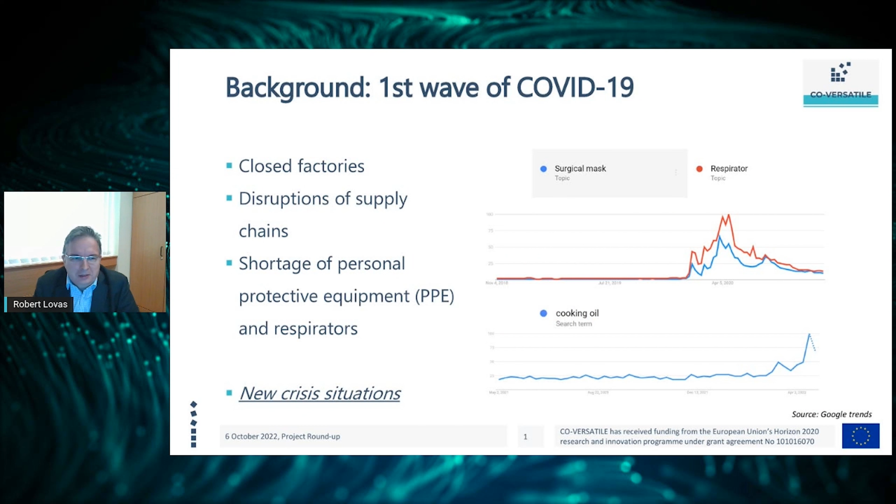On the next slide you can see the background of our activities. COVID-19, as a global health crisis, caused very serious disruptions in supply chains, as Gabor mentioned. At the same time, the unprecedented demand for personal protective equipment, as shown in the Google Trends diagram on the right-hand side, required a really rapid industrial response and production at short notice. In most European countries and globally, governments ordered people to wear face masks, which very quickly became a proven and simple way to somehow prevent virus spread and protect citizens.

So we had an extraordinary situation around the world. Everybody struggled with a shortage of masks, ventilators, disrupted supply chains, and we were witnesses of really chaotic situations. If you take a look at the diagram, we are still witnessing newer and newer crisis situations, which even caused a shortage of vegetable cooking oil recently in the UK due to the Ukrainian situation. Let me introduce some projects coping with such challenges in the next slide.

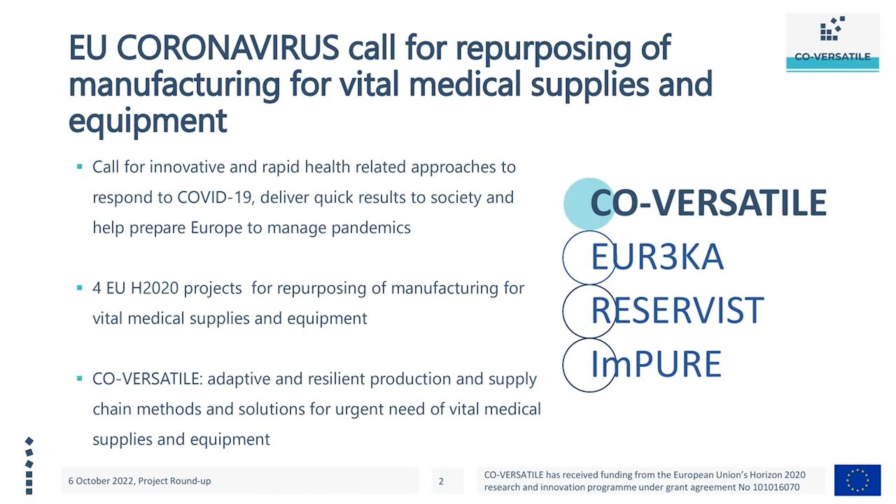On the next slide, I would like to highlight the most important achievements of our project in three distinct categories.

On the other hand, we also offer manufacturing companies a replicable method for fast repurposing of their production lines for manufacturing different personal protective equipment, such as FFP2 silicone masks, in really high volumes on short notice. We were able to increase the production capacity by 400%, exceeding the initial goal, which was only 100%.

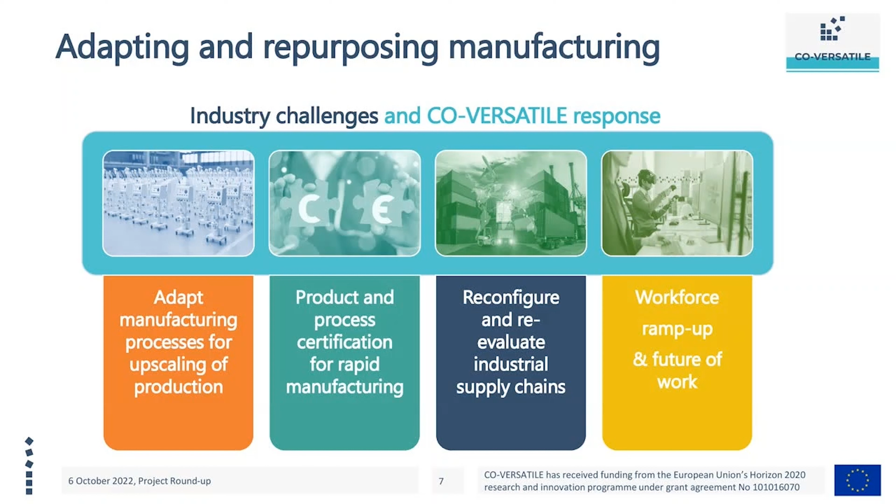You can see things like adapting manufacturing processes for upscaling of production, product and process certification for rapid manufacturing, reconfiguring and re-evaluating industrial supply chains, and also very important aspects for workforce ramp-up and the future of work. These four pillars have to be answered together, and provided together to respond to this crisis. Okay, next slide, please.

Also, as another achievement concerning the SZTAKI disinfection system, we were able to increase performance by 70%. Also, in the case of the resilient automation for manufacturing topic, we were able to double assembly capacity. And the last one I would like to mention was a very significant improvement, regarding ramp-up production of ventilators.

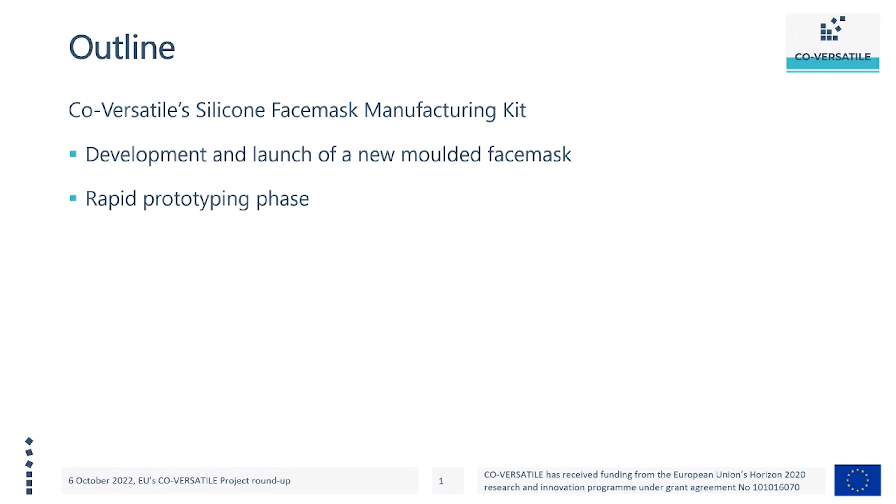Let's start with an outline. This silicone face mask manufacturing kit consists of several steps. The first is that I will go through the development and the launch of these face masks together with you. We started quite early with a rapid prototyping phase to get a better idea of the design and the touch and feel of our mask.

We transferred this prototyping result into a real product, a molded silicone rubber mask, into the mold. I will go into detail with that. And we always kept in mind an easy scale-up of the production. So depending on the demand for face masks, we think we found a nice solution to respond to changing demand.

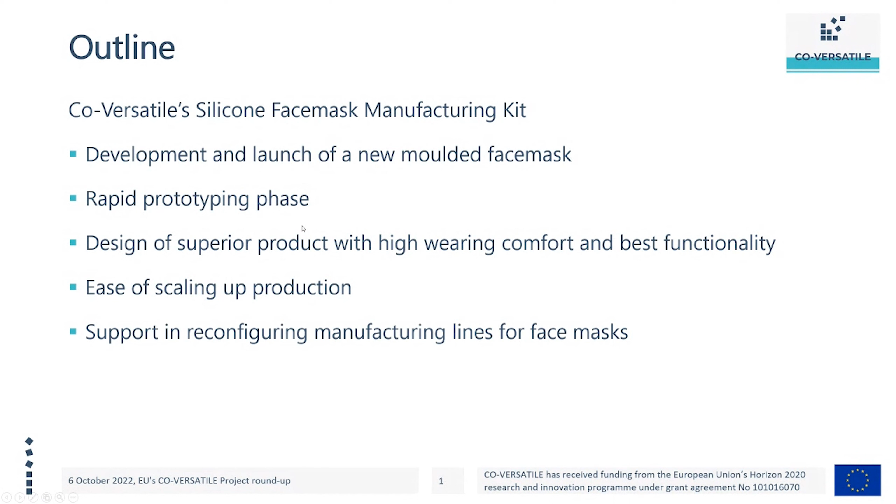We will support other manufacturing sites to reconfigure their production lines for face masks. We support them in planning their supply chain, and if needed, for the company and product certification, especially in terms of medical certification of the company.

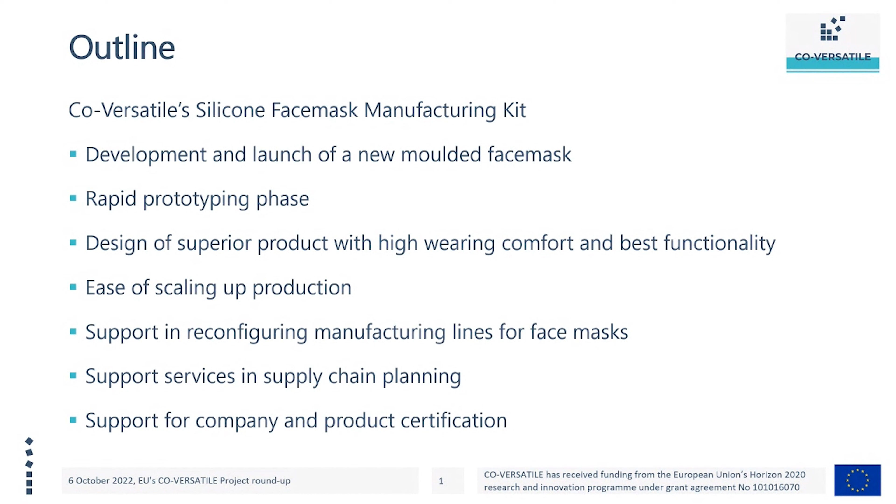First of all, we took advantage of our large intersectoral and interdisciplinary team. We were involving 3 SMEs, manufacturing SMEs: first a mold maker based in Italy, ORP Stampi, then the manufacturer of these molded parts, which uses the molds from ORP. This is SKM Aeronautics from Israel. And we had ML Engraving, an SME specialized in laser engraving of molds.

This is important if you consider wearing a rubber face mask on your face all day, then it helps if we have a nice texture.

They got support in terms of R&D for process simulation, so molding simulation tasks, by ITA Innova in Spain, and the rapid prototyping phase was done by ourselves here at the University of Hannover in Germany.

Furthermore, we got business consultancy support by a wider team - I will go into more detail later. We had help with certification issues from SUPSI in Switzerland, training documentation for enabling other manufacturing partners to build our mask by HSSMI from Great Britain. The supply chain analysis was led by Fraunhofer IML, and risk awareness and risk analysis was performed by IE Business School from Spain.

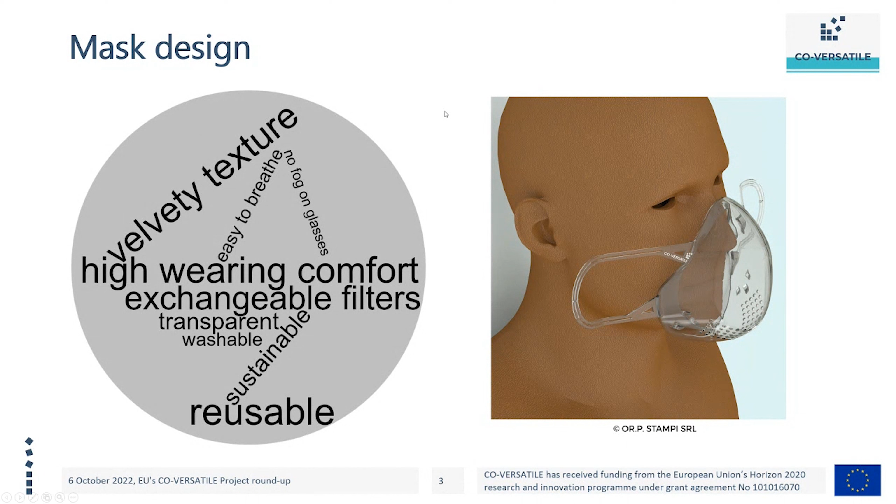So first of all, we had to choose a material, and we went for silicone elastomers, HCR grade. This is solid silicone - we would not go for liquid silicone, I will explain that later. There are medical grades available on the market by several suppliers. They are very easy to process and they are non-toxic, which is important if you look for medical certification, and also important for supply chain considerations, that these basic rubber compounds are available on the market.

Next step is the filter. The filter in our solution will be attached to the rubber mask. There we have 2 solutions available in the market: one is the cloth solution and one is non-woven filters. Both are available in grades which are relevant for us, so N95 or FFP2 respectively. Again here, we had to take supply chain into consideration.

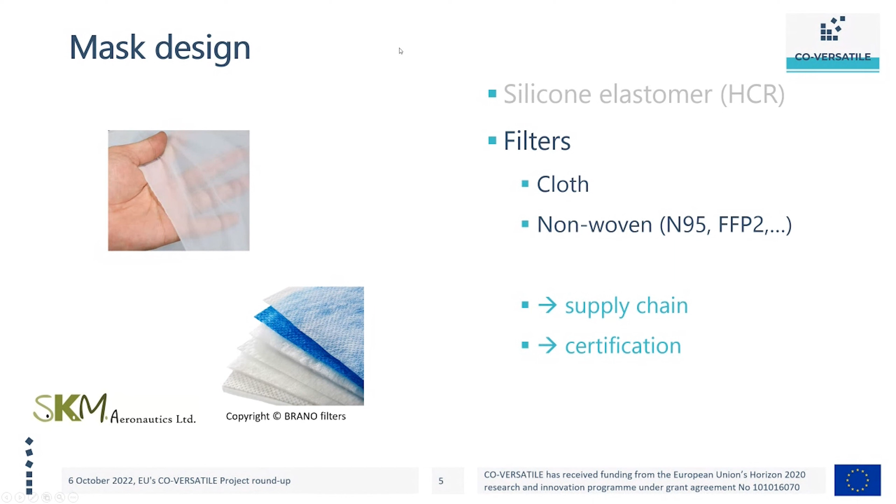Both are available very easily also from European distributors. For certification needs, both are certified and need to be certified with the mask as a whole product in a later stage, but we have to take this into consideration when choosing our filter material and also when choosing the supplier.

Transparency was one of the key ideas behind our mask production. We went for rapid prototyping based on a 3D printer with SLA, stereolithography technology, in our lab. We printed the full rubber mask in the first design to try to fit it to different faces to see how it feels - if the structure is stable when you breathe in, it should not collapse. We also printed different microtextures to see how it feels, especially on the sealing lip on your face, and also on the laces behind the ears.

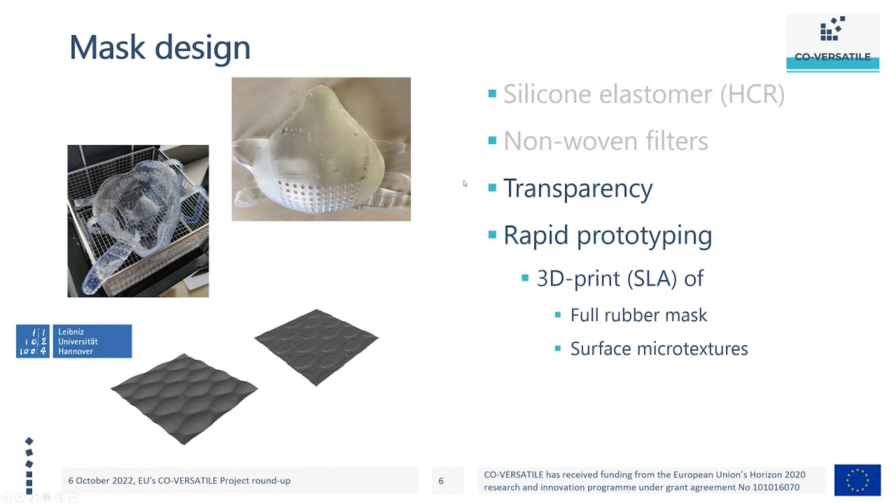At the same time, ML Engraving started to texture different flat samples at first to get a velvety texture, as velvety as possible. Later, when you see the complex geometry of the mask, you have to consider that this is a free-form surface which has to be textured from every position. They were using nanosecond or picosecond laser technology to apply this negative of the texture on the mold. We textured all the parts which are in direct contact with the skin to get as comfortable a feeling as possible when you wear the mask for a longer time.

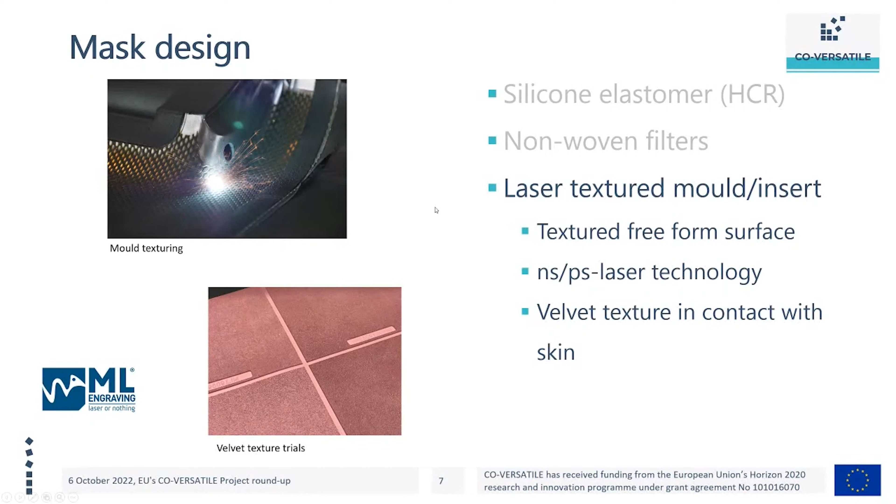For the mask design, when we summarized that, we were selecting materials. We went for the HCR silicon rubber compounds. We defined a velvet texture for wearing comfort. We went for an adjustable strap, or adjustable laces, so that it can be fit to different face sizes. We ensured a proper filtering through our cloth or non-woven filters. And at the same time, we need to seal all around the face so that the air you breathe in or breathe out goes through the filter and not past the mask somewhere else. This proper sealing also has the big advantage that your glasses do not fog.

Coming back to certification considerations, it needs to be fail-safe in use. You only get your product certified when you will wear it properly and the use is fail-safe and easy.

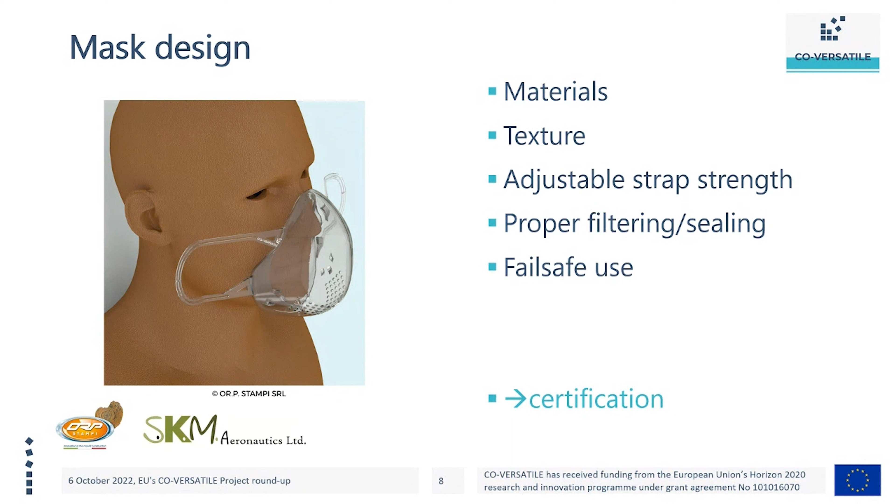Now, when we finished the mask design, the next step is to design and build a mold to produce our masks. One consideration was that we had to fit our mold to a very common vulcanization process, which you find at different rubber manufacturers all over Europe. This typically is a press with an area of 500 by 500 square millimeters, which also defines the number of cavities, or masks, we can mold simultaneously. In this press size, it's limited to 2, so we offer 1 or 2 cavity molds.

If you look on the right, the green part is an insert which we use to demold our mask, so you do not have to manually demold the part, but it can be automatically demolded. This is the part which is textured, so it's quite easy to only send this small insert to our texturing partner ML. You do not have to send the whole mold.

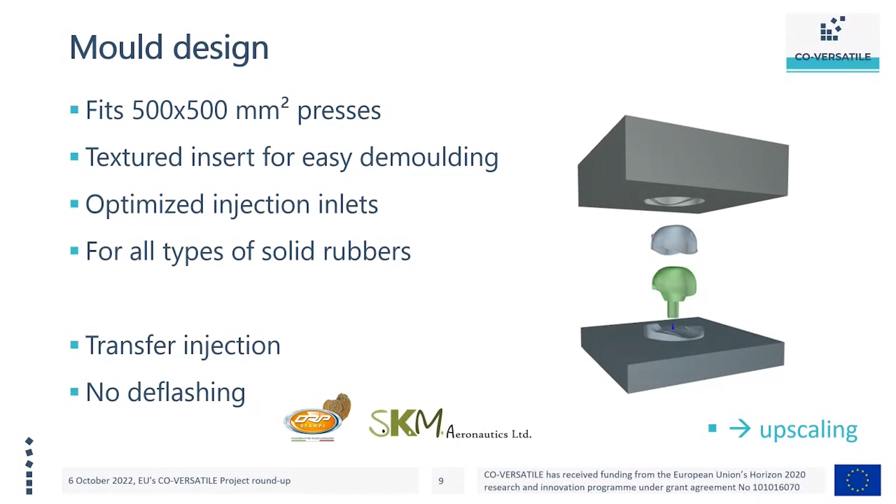Concerning the molding process itself, we started to compile training documents so that we can transfer our technology to other molding manufacturers. This considers material handling, from material incoming inspections to overall QA procedures before and after the molding, and the molding process itself, including molding parameters like temperature cycles and pressure cycles.

Post-curing is very important for medical products, they need to be fully vulcanized and fully off-gassed. This is part of our documentation, and we made considerations on the traceability of each product, which is important for obtaining the medical certification.

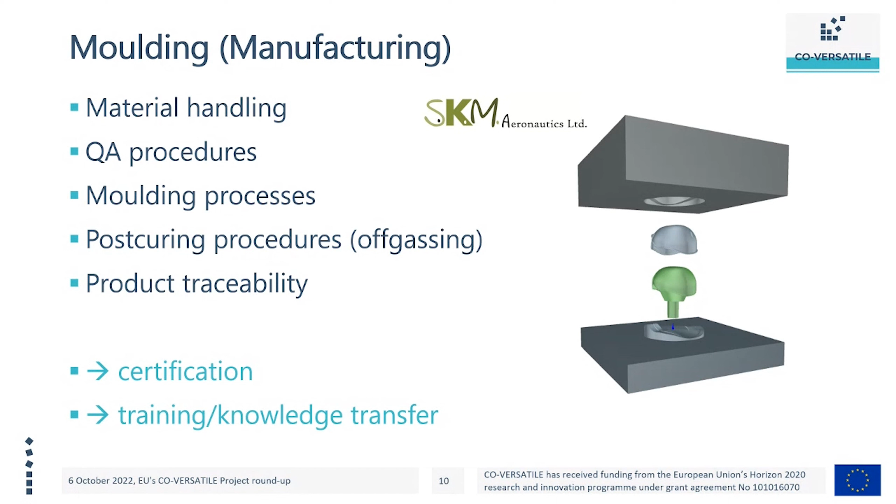Together with our partner HSSMI, we compiled a training and knowledge transfer package, which is based basically on a 3D PDF documentation where you can interactively get all the information you need.

In the upscaling and reconfiguration activities, we got support mainly from 4 different partners. We performed a risk analysis considering production risk, supply chain risks, market risks, and the risk of certification you might need. There we got support from IE Business School.

The supply chain of our product was analyzed by Fraunhofer IML. So we included tier 1 and 2 suppliers, transportation times, market demands, and the ability of our production line to produce a certain number of masks. We got help with the training documentation by HSSMI, and certification issues were discussed and analyzed by SUPSI.

Now, coming back to the manufacturing kit, we offer a full kit which contains a 1 or 2 cavity serial mold. The serial mold on the right-hand side you can see in our production line, where we produce 2 masks of different sizes. The left-hand side is for adults, and the one in the background is for children.

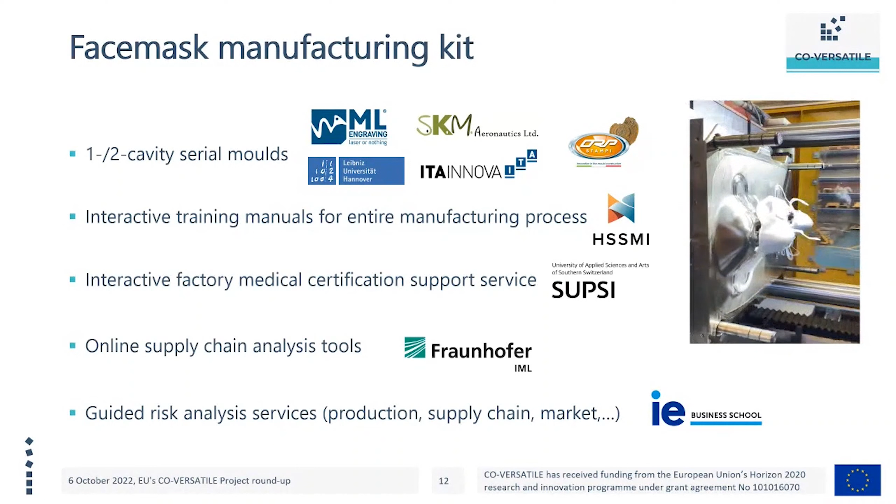We have an interactive support on medical certification, thanks to SUPSI, integrated in the digital Technopole, which we will see this afternoon. We have an online supply chain analysis tool provided by Fraunhofer IML, where you can analyze your own supply chain. And we have a guided risk analysis service provided by IE Business School to analyze your production, your supply chain, and market demands.

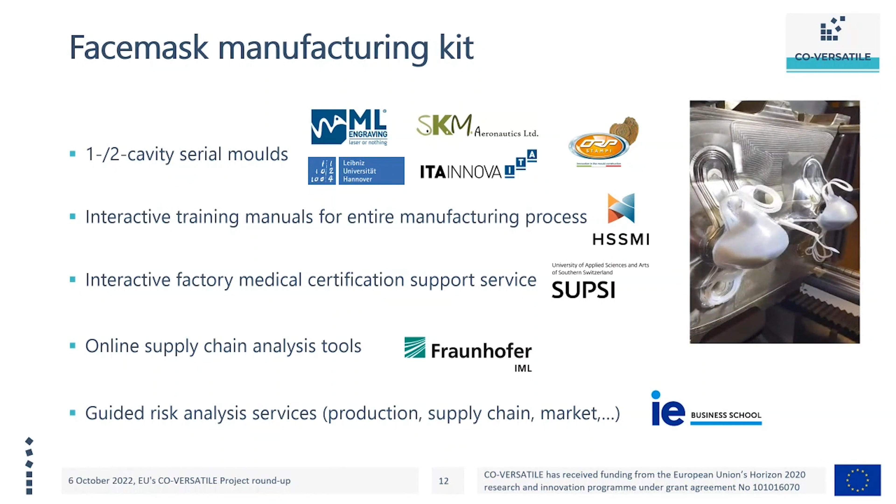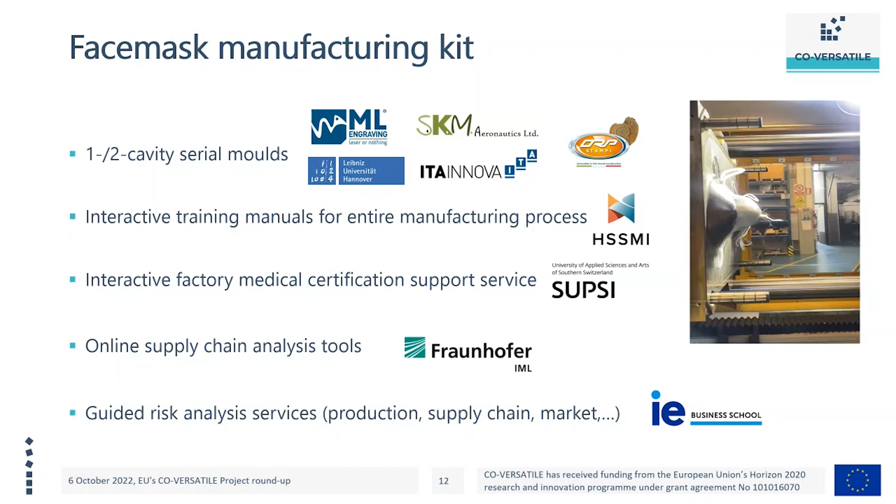This altogether is offered as a manufacturing kit if you want to start producing face masks on your own. That's it from my side. Thank you very much for your interest.

Thank you, Matthias, for this interesting presentation. We do have one question from the audience: you mentioned you were working with an interdisciplinary and intersectoral team. I would like to ask how you were able to manage this and how communication was managed among this team, because I guess the COVID pandemic also made some extra challenges in terms of traveling and personal meetings. How were you able to cope with this?

Actually, there were only 2 personal meetings throughout 2 years. It was indeed possible to work together in virtual sessions, and product design can be done virtually today. There are quite nice tools available. What helped us was the quite strict project organization with the build, measure, learn cycles, which we introduced in the beginning, because we had to apply this also in our smaller team, and there was a clear timeline based on these cycles, which could be quite easily and successfully applied to our product.

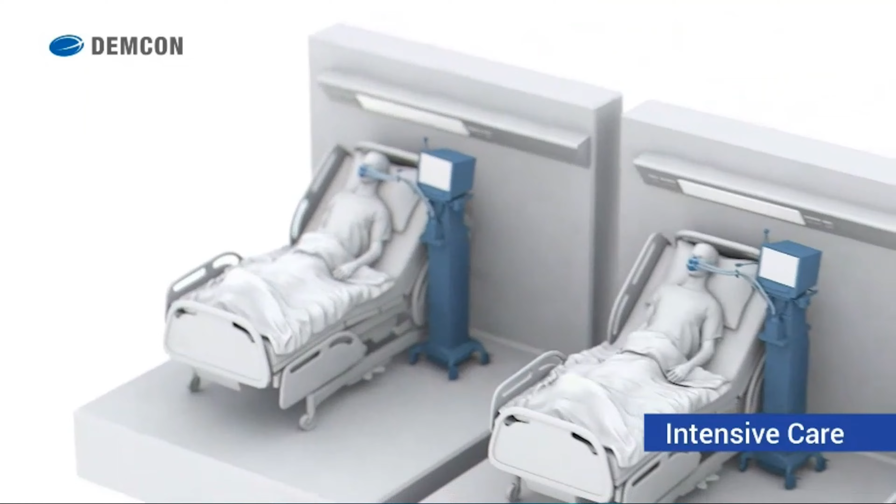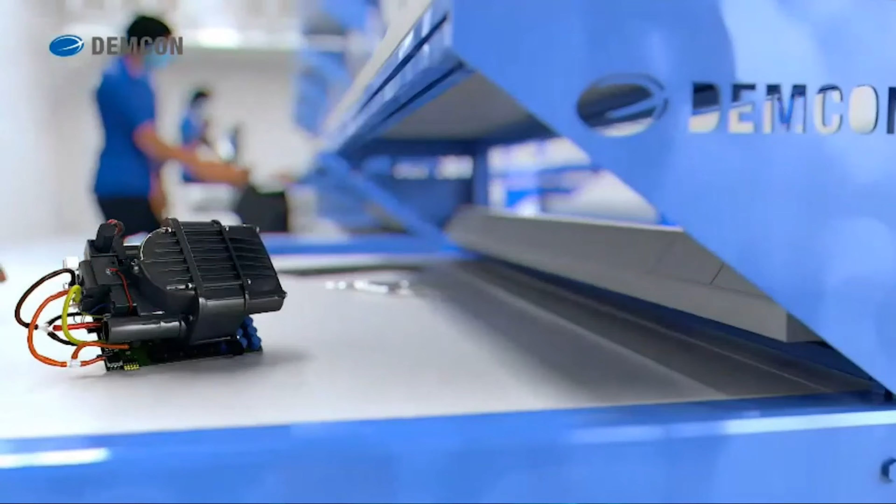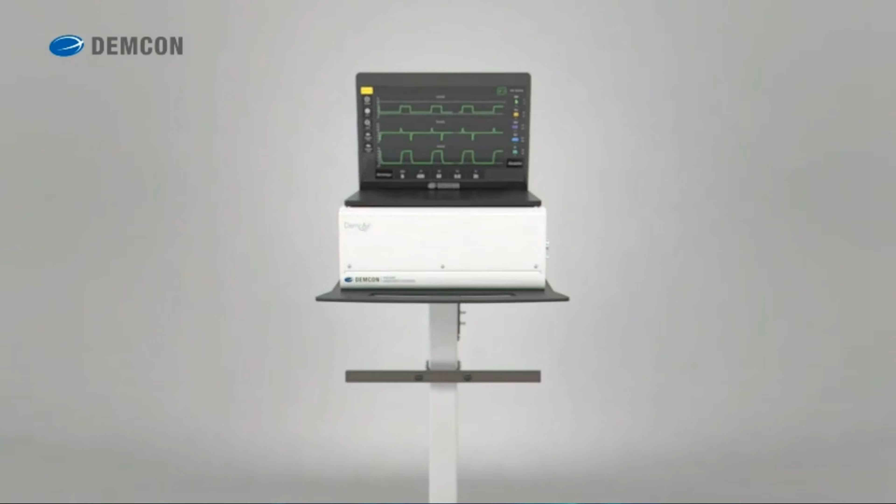The virus is having a major impact on our society, and everyone can contribute to flattening the curve to ensure our healthcare system is not overwhelmed. A major challenge is to equip hospitals as quickly as possible with ventilators for those who desperately need care. DEMCON develops and produces modules which form the heart of these machines. We have significantly stepped up production to supply manufacturers of ventilators all over the world. In addition, we took up the challenge to develop and build a simple, complete ventilation system based on our existing modules and years of experience. We are proud to have realized the DemcAir ventilator, a new system created on a vastly accelerated timescale to meet the surging demand for these systems. With great commitment from our colleagues and heartwarming help from our partners, suppliers, and government, we have the opportunity to contribute to the global fight against this crisis.

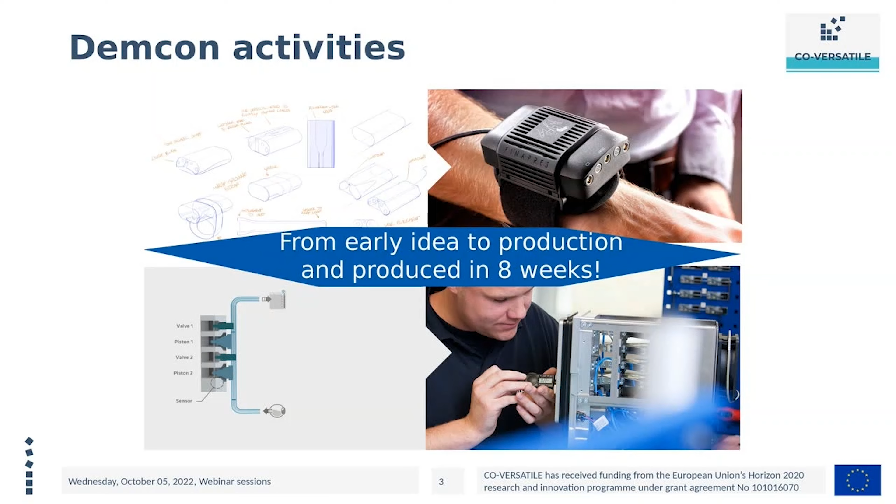So I think this gives you an overview of what we are doing and how we developed the system. Let's take you along the storyline of the DemcAir development.

This all happened in March 2020. We started at a certain point with some lines between the government and DEMCON to talk about the ramp-up and availability of ventilation devices. We called it day minus 3, because it was before the formal quotation and order were placed, to have some meetings on the project. In those first days we started to sketch how such a system should look, which you see in the pictures.

So we created a simple box where our module was placed, and at that moment we needed to think about availability of equipment, materials, and components. The complete design and development of the DemcAir system circled around availability of components and products, and being able to complete it with off-the-shelf components, since everything we needed should be directly available.

Also, the question we got from the government was to develop and build the DemcAir ventilator within exactly 3 weeks, and to produce 500 complete systems in the weeks after that, to be able to deliver them to the Dutch market and Dutch hospitals.

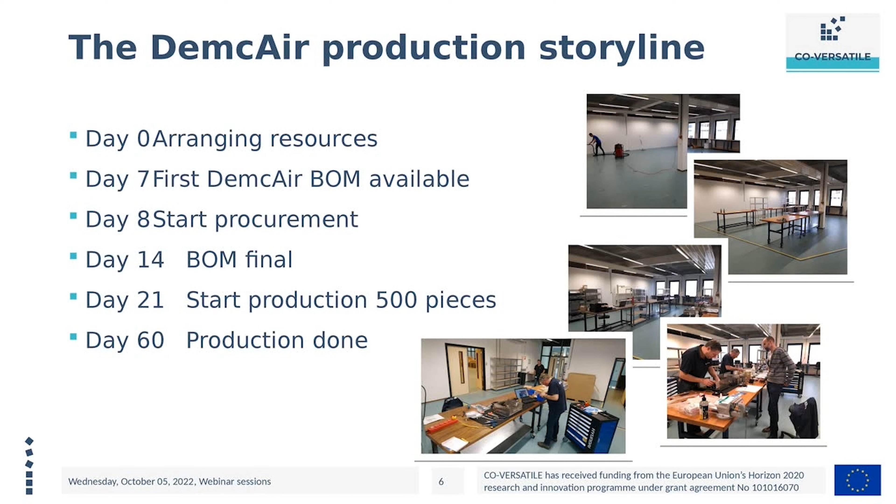There were a lot of interesting problems which happened in that period. First of all, it was component sourcing, of course. As said already, we needed to produce and develop with off-the-shelf components only, but there were already limitations at that moment in the complete chain. So the first question was how to get all those components out of the chain.

We were in a lucky situation here in the Eindhoven area where we produced the system, that we've got a lot of suppliers pretty close to us. And we were also lucky that those suppliers had a little trouble with their running projects, as a lot of things in that COVID period were slowed down. So a lot of those suppliers were able to collaborate with us and directly supply what we need - from milling and drilling parts and all kinds of things, we were able to directly get it from them.

As said, we designed only from what is available on stock. So in the design phase, we discussed with the suppliers directly - is it available and can we move on with these components, or should we go to an alternative because it's not available? So we eliminated all blocking items already up front, as we knew it was not available.

We also put our engineers - and I think that's one of the key success factors - directly at the supplier. For example, we worked a lot together with VDL, one of the big companies here in the Eindhoven area in the Netherlands. Our mechanical engineers were located over there to discuss which production methods they had available, and how we could easily make, for example, the covers of our system - so that we were not going to design something really nice which was not possible to create on the short term.

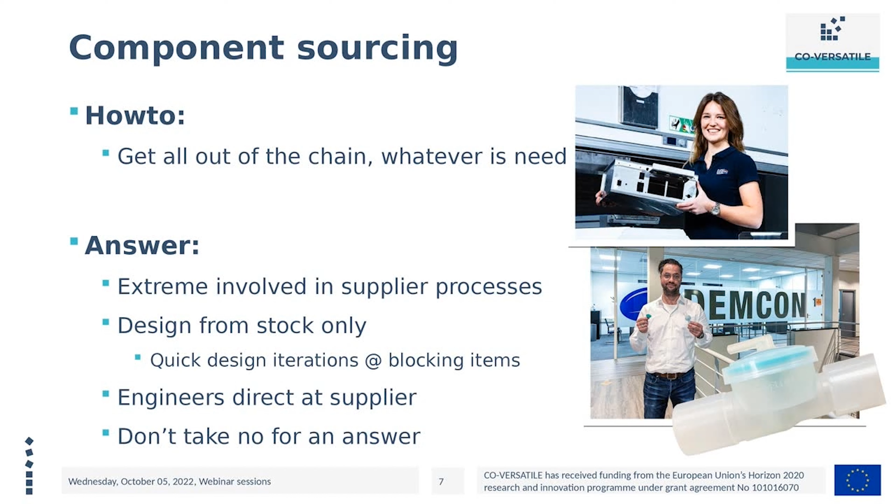Of course, we needed a lot of personnel and good trained personnel at that moment. We were again in a situation where old DEMCON employees were able to get back to our production facility. So we had to ramp up two productions practically in parallel. We have one production facility in the eastern part of the Netherlands producing our respiratory modules, and that production was also ramped up extremely. In parallel, in Eindhoven, we built the DemcAir system where we needed completely new personnel.

Here we worked together with suppliers from the direct area, and we asked them, can you please hand over some qualified personnel to help us build this? What we also did is use operators who were practically overqualified, and that had one enormous advantage - we did not need a lot of training time, and those guys were perfectly able to self-start. They grabbed a work instruction and simply started producing the system.

Our backbone of own people helped us extremely, because at that moment I think we were with 800-900 people within the DEMCON group. All our own people, our own backbone, were able to help in the production process as well as the development.

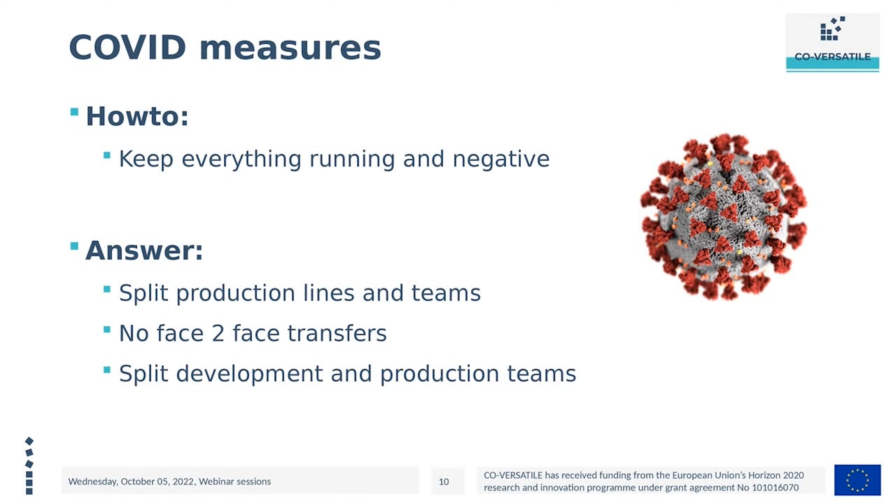In all honesty, the pandemic also helped in our complete system development, because everybody had one common goal. It was crystal clear for everybody what was going to be developed. As I showed the sketches in the beginning, those sketches became complete reality in the end, and nobody discussed what we were going to develop.

There was extreme focus, and everybody was extremely motivated in this whole challenge, because everybody was aware that if the COVID situation became even worse, those devices would be needed. Everybody felt they could really add something to the medical field, and everybody was extremely willing to help, from suppliers to customers. Everybody helped us get into a situation to make this happen.

So the moment we called a customer, they would slow down their project; if we called a supplier, they would stop producing for whatever other customer and start producing for us. We even had a situation for one component, just as a funny example: we needed one loudspeaker for the system, an off-the-shelf product coming from the US, and there were hardly any in stock.

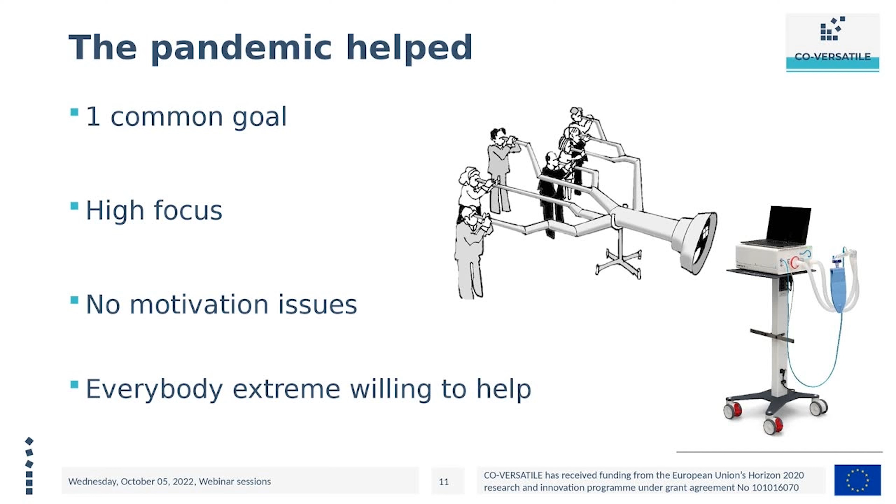And then there was also a really special situation around certification. Of course, the CE certification was, let's say, chopped into 2 parts. There was a CE exemption first, and we were ready with the CE exemption certification part in 6 weeks. The development of the system itself we did completely according to the rules.

It's developed according to normal medical standards at that moment, the MDD, and we had also extremely short lines with the DEKRA, our notified body. So we had discussions on a daily basis.

Making the balance for what we shall do, what is needed on the documentation side, on the test side. Due to those extreme short lines, we were perfectly able to not cut corners, but take the corner a little bit more sharp, and do exactly what is needed instead of doing something and going to certification or to the notified body, and they say, well, it's nice, but you also need to do this and that.

We changed that order, and up front we were perfectly able to decide what to do, as we knew that those guys already agreed with the way of approach.

And what we also did in the certification part is that the devices, after they were produced, we gave them an upgrade and created a complete CE four months later. So I didn't want the Dutch government to think the machines were less worthy for them if they didn't have a full CE. So DEKRA was highly involved in creating the necessary steps to upgrade all those machines from a CE exemption to a complete certified system.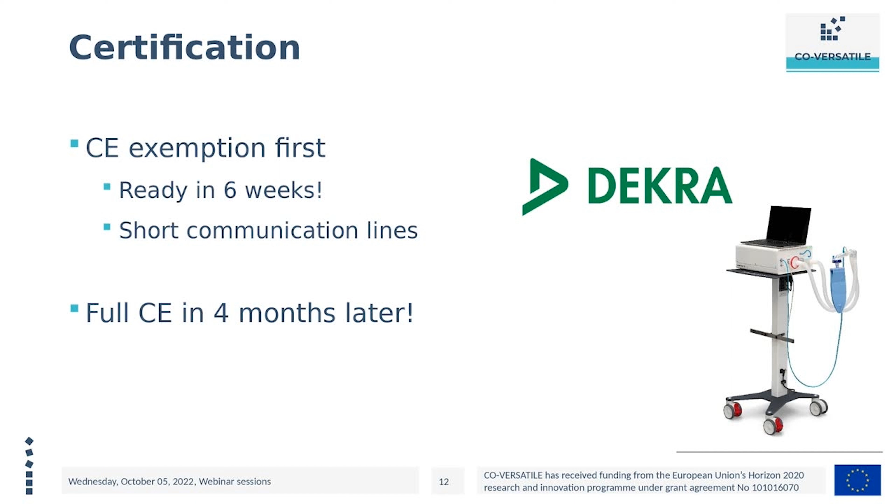I think this is, from our perspective, the most important thing that happened in this period, and it's what we call extreme partnering. So what we did, we have the short lines on the upper side from DEMCON to DEKRA, as the certifying or notifying body.

We had extreme short lines with three hospitals. We developed our system with those three hospitals together. So in the first days of the development, we already had a couple of doctors here on site, even though they were busy in the COVID situation. They came here internally to discuss with us what is the exact requirement on the system, what needs to be in, and what kind of stuff you can keep out, to really keep a simple system which is perfectly able to be used in the COVID situation.

And on the top side, you see the Ministry of Health, which is practically our customer. So the triangle between DEMCON on our side, the notifying body, the customer, and the end user, I think was an extreme nice situation, on such short lines, to collaborate with each other and to exactly know what you need to make on one side, if it was going to be approved on the other side, and that the end customer, the ministry, was happy in that situation as well.

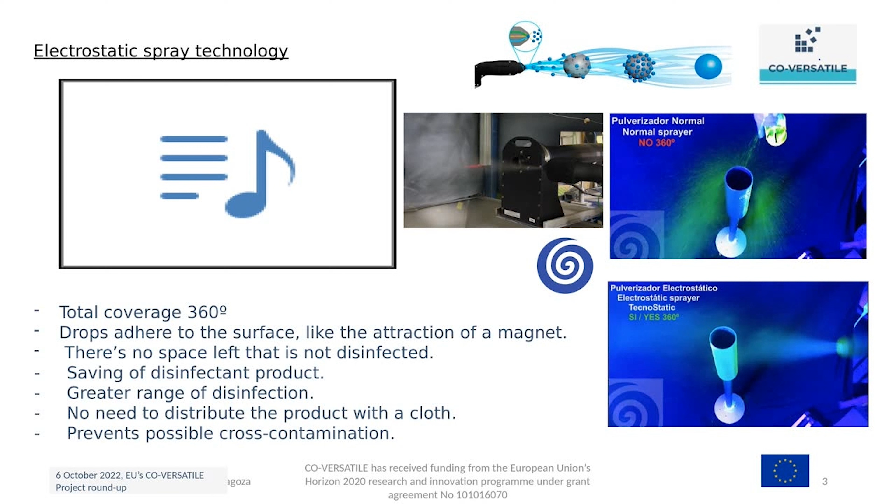We have a greater range of disinfection. We don't need to distribute the product with a cloth — it's okay only with the electrostatic spray machine. And thanks to this, we prevent possible cross-contamination provoked by using a cloth from one place to another when we're disinfecting. Next slide, please.

Tecnostatic has created a manufacturing process to adapt to emergency situations and to be able to respond quickly and efficiently: material stock agreement with the supplier, agreement with the transport company, and training of workers agreement with the auxiliary company.

Coversatile has modified our manufacturing system and has enabled us to increase production considerably. We have modified the manufacturing production of the gun casing. Previously, we could produce 100 units per month, and now 2,000 units per month. Our suppliers have adapted to a supply system, and in 48 hours we have the components in our facilities.

We have formed an assembly system. Previously, we could assemble 100 units per month, and now 2,000 units. We have trained personnel from external auxiliary companies and increased our assembly capacity. We currently have an initial stock to provide an immediate response to an emergency situation.

The process of certification in compliance with European standards is currently underway. Our aim is to complete this process in the course of 2023.

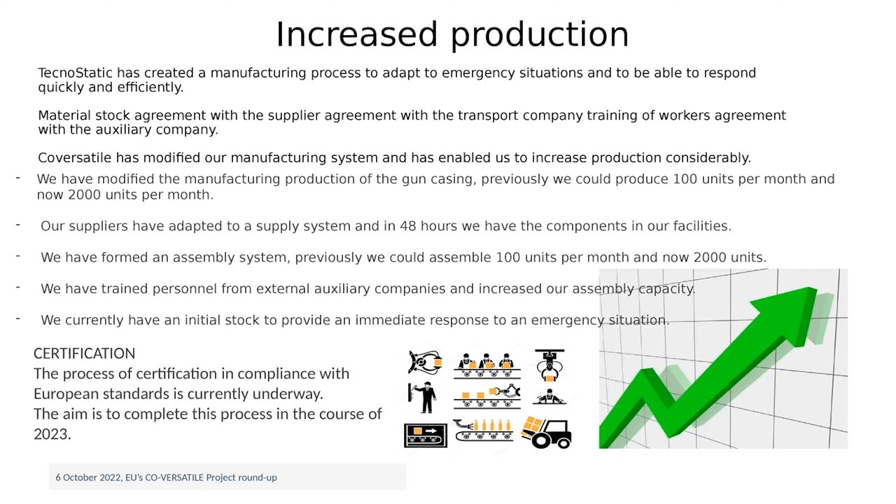Tecnostatic, in addition to having its own staff, has created a work team outside the company, giving training, and has signed a commitment contract that in case of pandemic this work team will join our company. These people have been trained in the different production processes. The commitment to join our company is verified every 6 months.

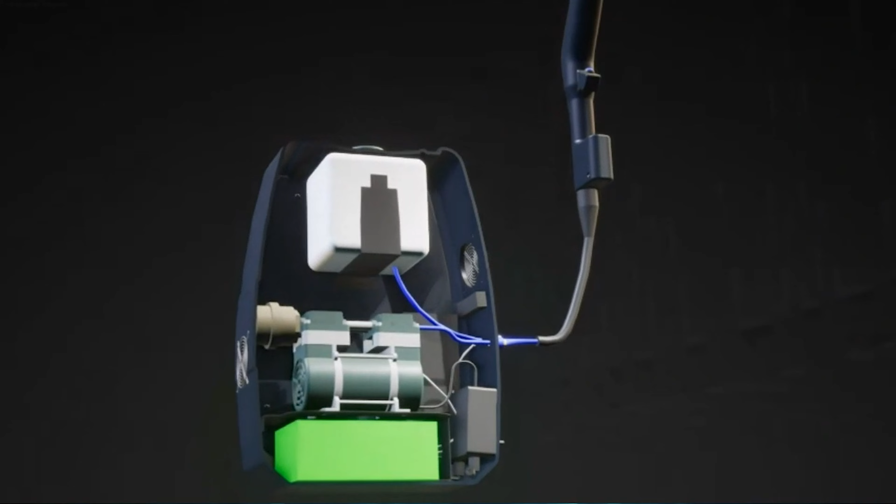Regarding the production of the equipment, here we can see the configuration of both the inside of the backpack and the gun. A specific mold was designed to correctly create the application in the nozzle of the gun. Here we have another video, I think this one is possible to be shown. So in this video we can see in 3 dimensions the different components that make up the backpack of the electrostatic spray gun.

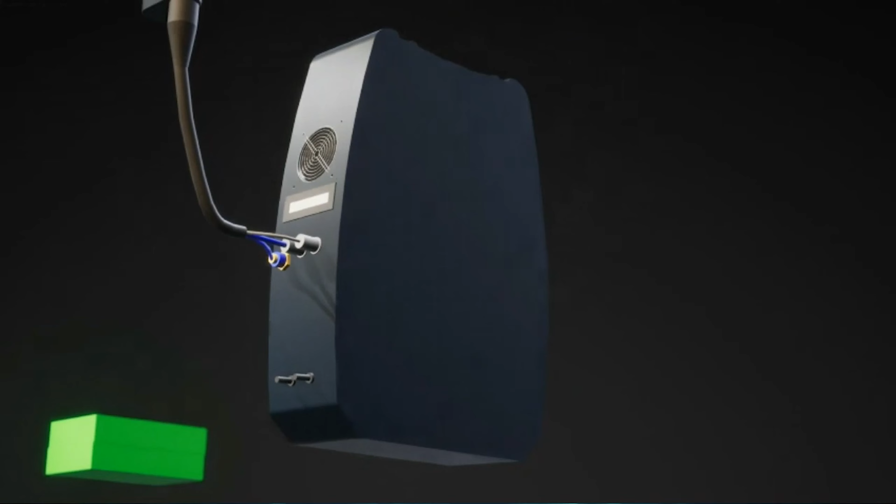Normally this video was to be shown while I'm talking because it was inside the slide, but well, it's okay — you can make the idea of what the components are.

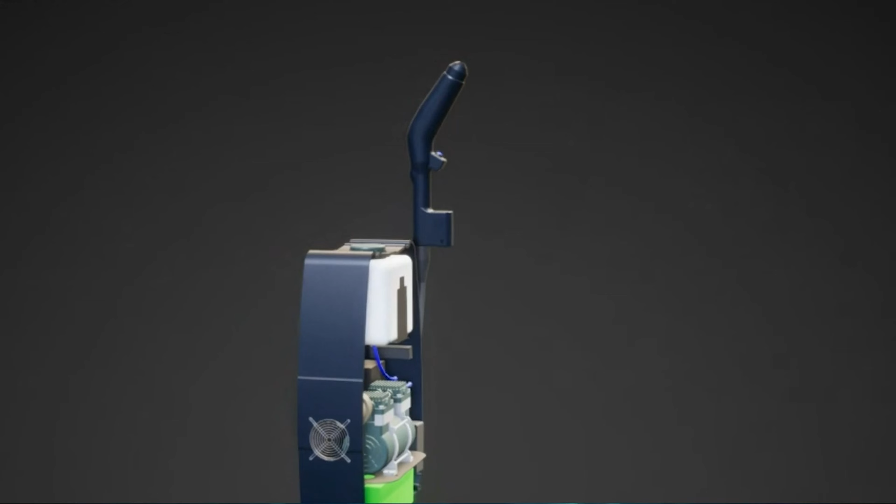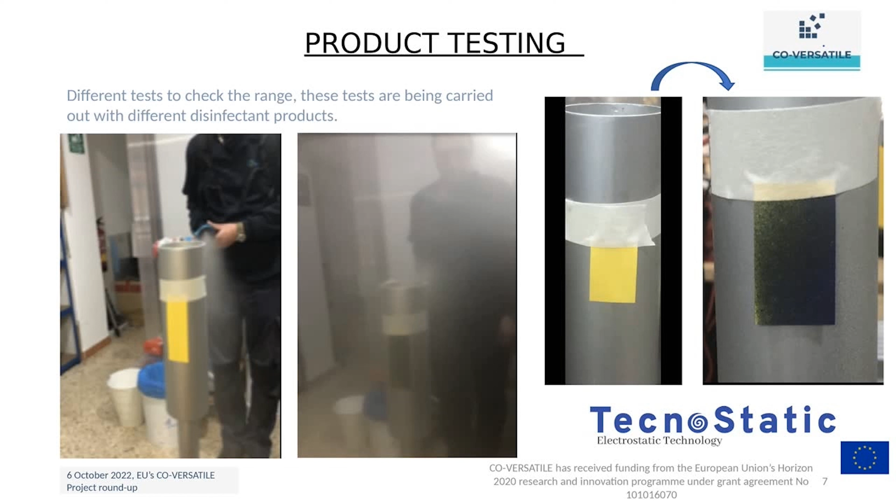Finally, as a conclusion, we think our spraying system is technologically the most advanced system in the world for all the benefits it has that we have mentioned above, apart from many more. If anyone is interested, we can of course have a meeting and a longer conversation. Belonging to CO-VERSATILE has helped us create autonomous battery equipment without an electrical connection, which has been able to significantly optimize our technology and equipment. This has been accompanied by an improvement in costs and an increase in production capacity to be able to respond to demands in future critical situations. We hope we don't have to respond to these demands, but in case we do, we're prepared.

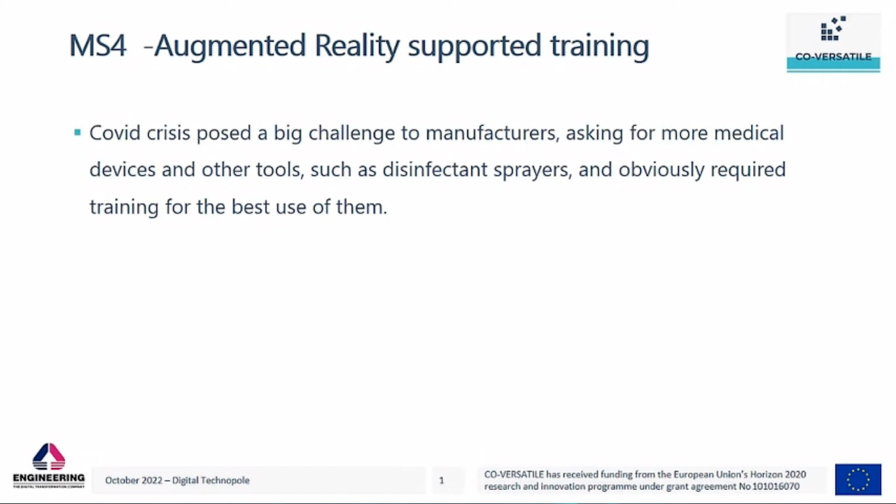Manufacturing Setting 4 responds to these criticalities by acting on product features and supply chain resilience, and a novel technology has been developed. In this video we explain how the technical manuals and the 3D model created for the novel device have been used to build an augmented reality training tool to support users on the best use of it.

The Space1 platform is a leading solution for extended reality technologies that support the use of AI, and has been used for the development of advanced training and remote collaboration, to demonstrate the support to junior technicians during maintenance, facilitating collaboration and knowledge sharing, even remotely.

The first screen shows the main menu, where the training tasks are managed with defined work orders. The 3D model of the spray device has been imported and split into an asset hierarchy, so different components can be searched and related manual items presented.

The knowledge repository keeps all multimedia information that could be shared among the different users. Finally, the extended collaboration option enables different users to set up a remote session where senior workers support junior ones. The user has to define which device will be used.

It could be a tablet, a smartphone, or even a VR head-mounted display driven by voice commands. Work orders, the training tasks, are assigned to the user. Here we can choose between training for MS4 and MS6.

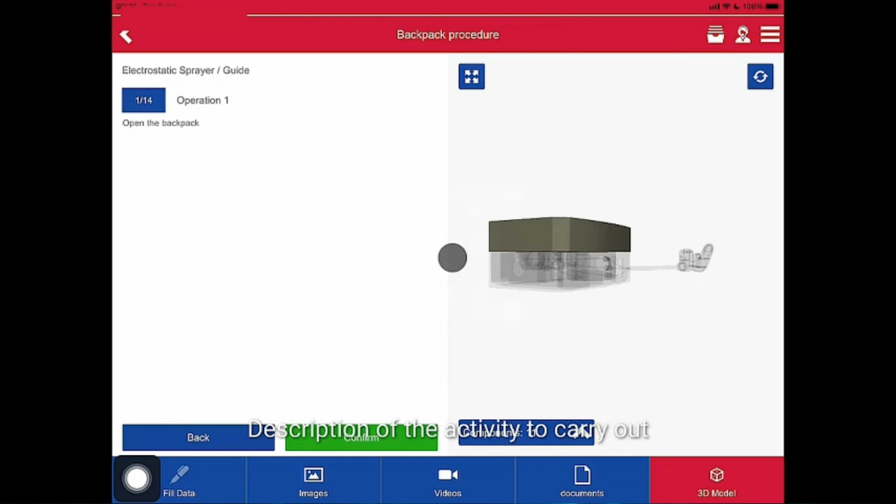Choosing the backpack procedure, we step ahead with the dedicated procedure of the disinfectant sprayer. Here we have a description of the activity to carry out on the left, while a 3D model of the asset involved in the activity is shown on the right.

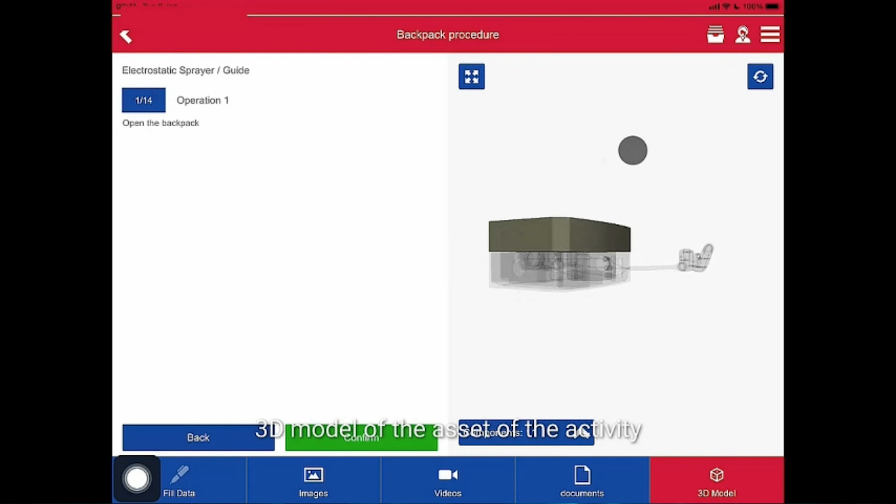The window on the right can be selected and a higher level of detail can be shown. We can view or hide different components of the 3D model. The full list of components is presented in a particular panel. The gun in the video has been selected.

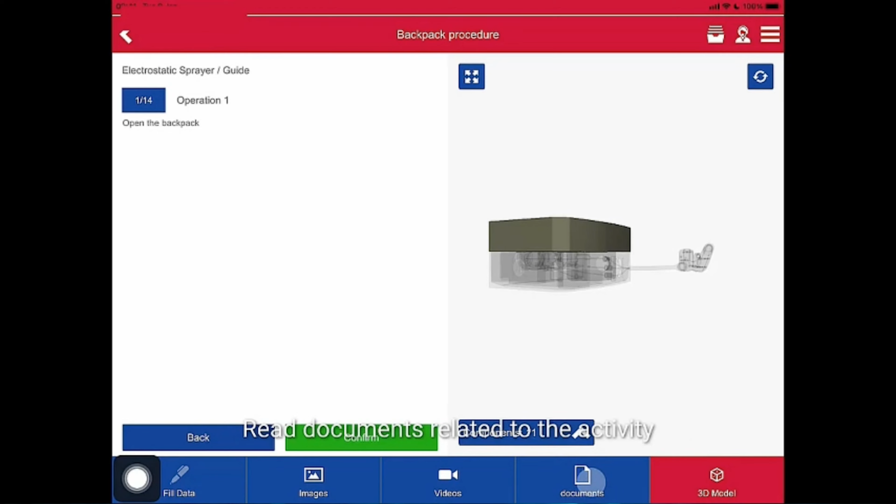From the menu below we can select documents, thus showing documents related to the specific activity. Here we can see the spray technical manual.

We can also select the video option, which presents recorded video related to the activity. The presented video explains in detail the procedure used for changing the backpack battery. This could be a better option for a junior user than reading the manual.

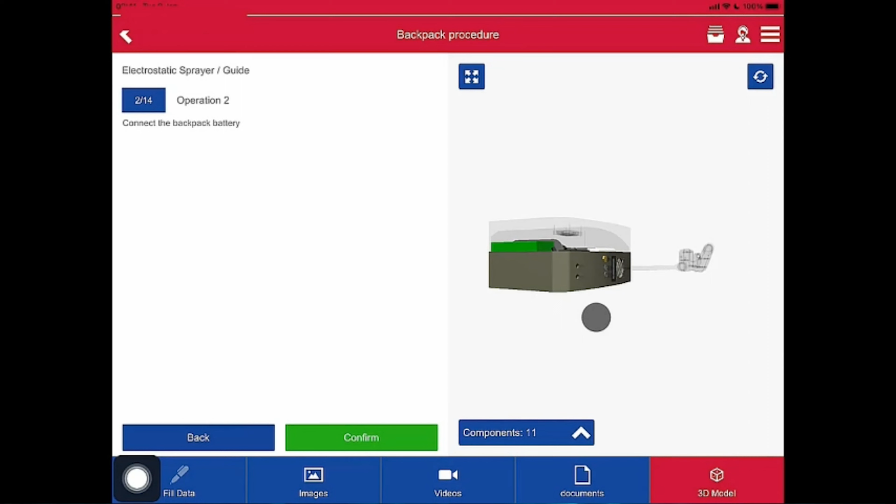Selecting images, some more details on specific components could be showcased, helping the user in the procedure. Once the specific operation has been completed, the user can move to the next step in the procedure. Here we have to connect the backpack battery.

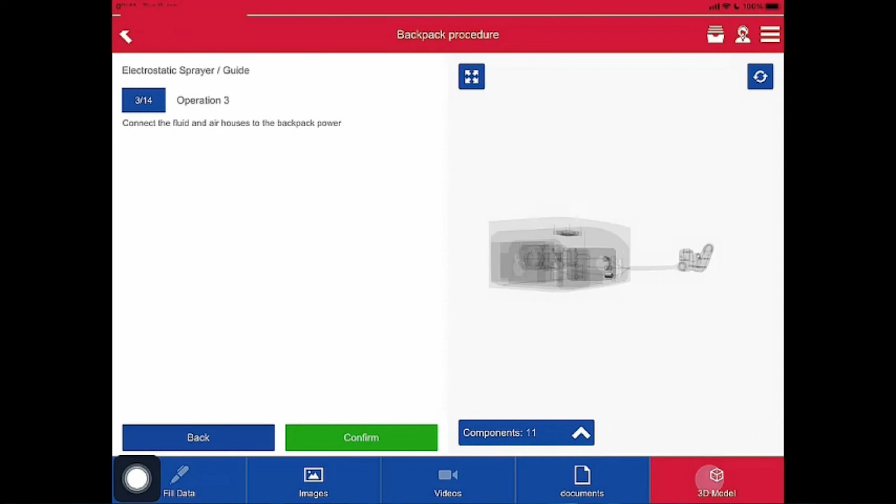Again, images and videos can guide the user in the specific activity. At the end, the next operation can be started. Here we have to connect the fluid and air hoses to the backpack power.

In this case, the user can get more help navigating the 3D model, localizing the component, then proceeds opening the cap of the tank and pouring the product. Again, the linked images can provide all the details needed to guarantee the perfect execution of the activity.

The 3D model can assist in every moment, zooming in or selecting specific components, for example the hose connector, to enable the user to complete all activities easily.

From the top menu we can also select the knowledge repository and consult it for useful content, for example images, videos, documents, or other annotations related to the procedure. Here, for example, some videos are available for the users.

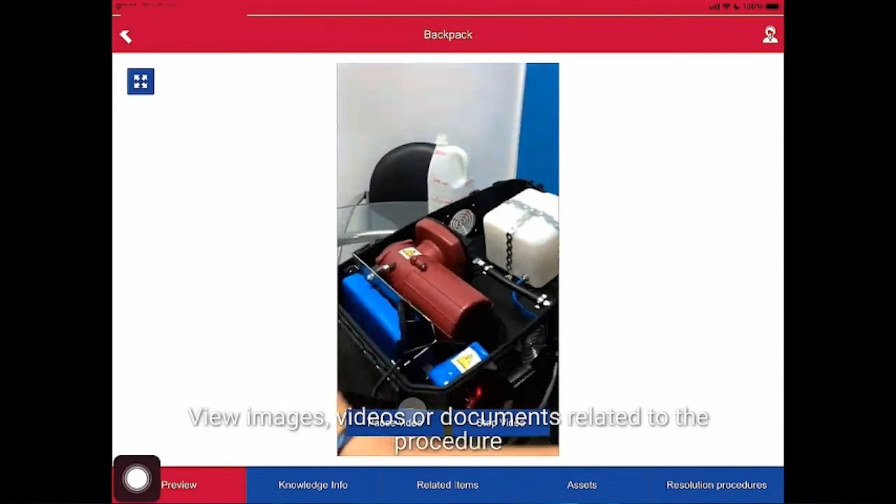So, to summarize, extended reality technologies have demonstrated to be an effective support for advanced training, remote collaboration and knowledge sharing activities, which are key elements to be leveraged in case of crisis such as pandemics. The cloud is a technology that can boost the impact of such solutions, collecting and making available advanced applications, contents and knowledge everywhere on Earth. In the CoVersatile project, the digital technopole is based on cloud and acts as a hub that provides all this expertise, and collects all lessons learned to join forces against COVID.

So, I think that this video has summarized the potential of the Space1 technology supporting the training, even remotely, of operators and technicians, to boost the performance of people responding to emergencies like COVID.

Just a few final words. Extended reality technology can obviously improve performance in terms of training, making people spread around the world join forces and work together. So the senior worker, even remotely, can help the junior one on site. And well, the other point is the cloud, which could be the hub that collects and makes available all the information to all interested parties. And in our project, the digital technopole played exactly this role.